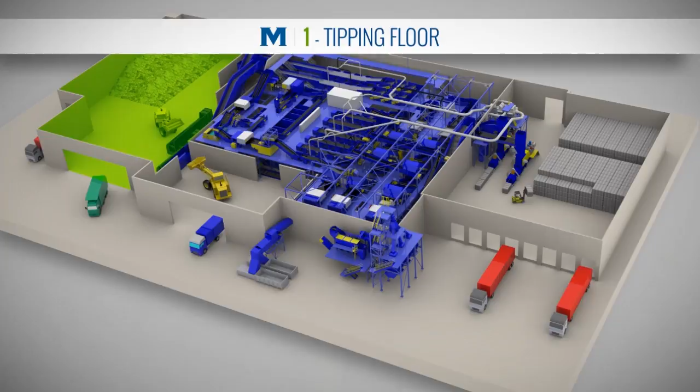A large tipping floor for incoming material is arranged so that multiple trucks unload their contents simultaneously. The tipper empties the contents of the dump trailers onto the tipping floor.

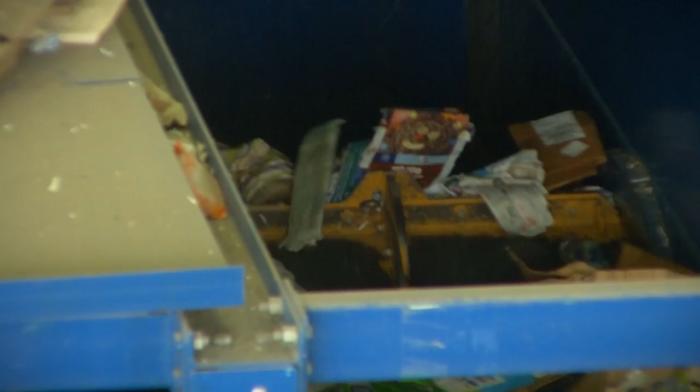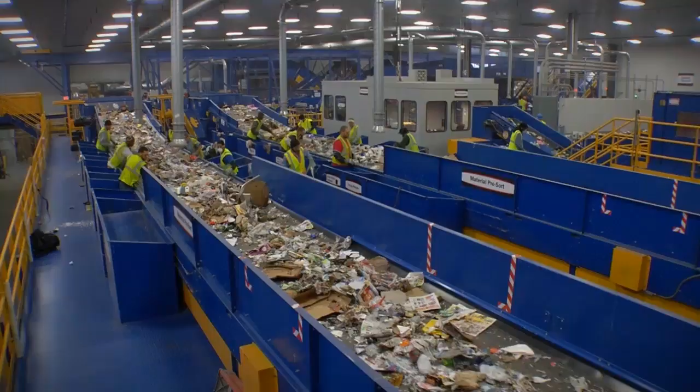The materials brought to the tipping floor are loaded into 2 drum feeders that equalize the flow of material entering the system. Sorters remove rejects such as large metal parts, electronic devices, and any objects that could damage the equipment. They also remove plastic film by using a vacuum system equipped with hoods that are placed above the sorting stations.

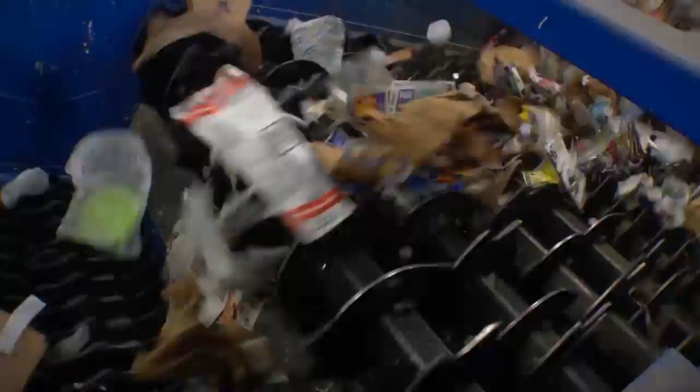Once the rejects are manually removed, the stream of material is sent to a MACH OCC screen to collect the cardboard. The cardboard bounces off the moving parts while the fibers and containers fall between the discs. The cardboard then undergoes quality control.

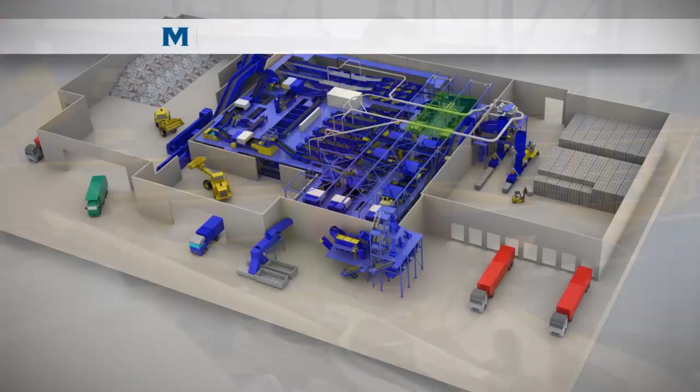The fiber is now sorted into 2 lines. The material that falls in between the discs of the MACH OCC screen undergoes a second manual pre-sorting before entering the scalping screen. The scalping screen is equipped with steel discs to break the glass early in the process to protect the equipment and prevent contamination of material. Fragments of 5 inches and under fall onto a fine screen that is located underneath. This separator redirects the 2-inch and under pieces to the glass cleaning system.

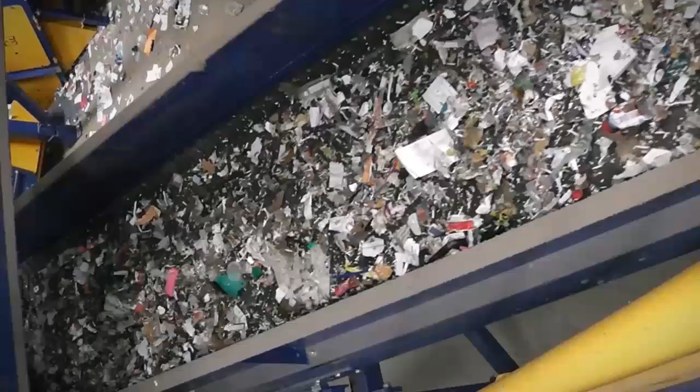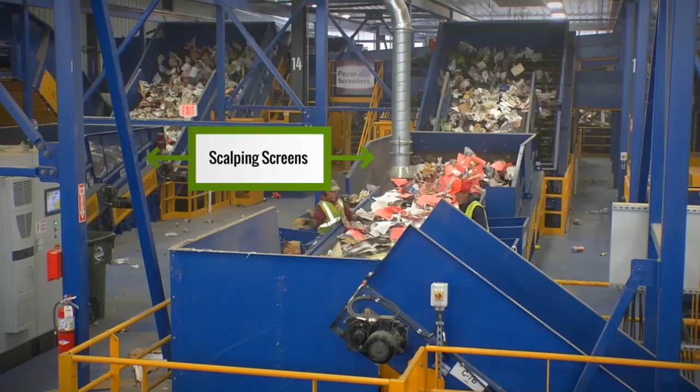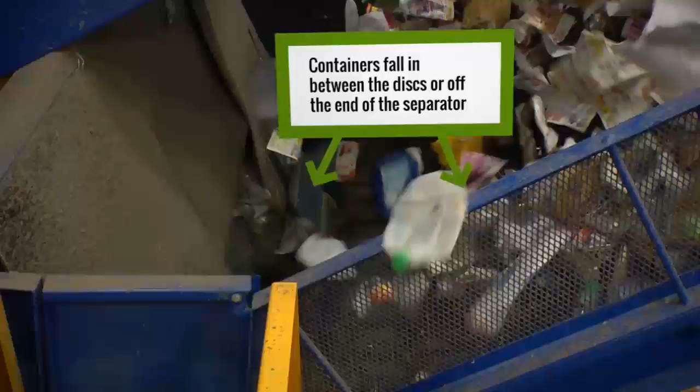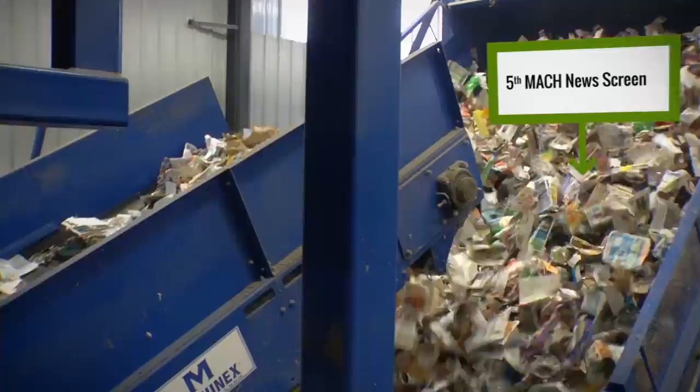On both lines of fiber, there are 2 MACH News screens, one on each side. They separate the paper from the containers. Newspaper travels up the slope of the separator while the containers fall in between the discs or off the end of the separator. The materials that fall between the discs of the previous 4 separators are directed to a 5th MACH News screen for newspaper to increase the rate of recovered fibers.

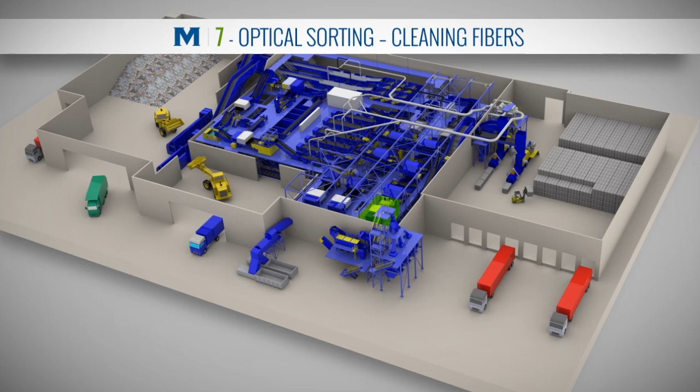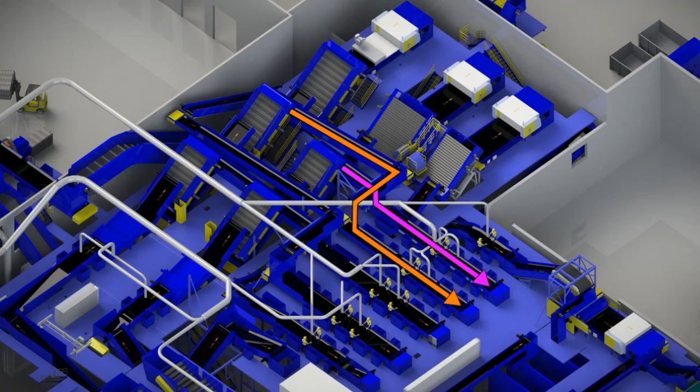The fibers exiting the 5th Mach News screen are sent to an optical sorting unit where contaminants such as brown cardboard, metals, containers, and plastic film will be removed. The stream of paper coming from the fiber line is finally directed towards a manual quality control before being sent to a dedicated bunker.

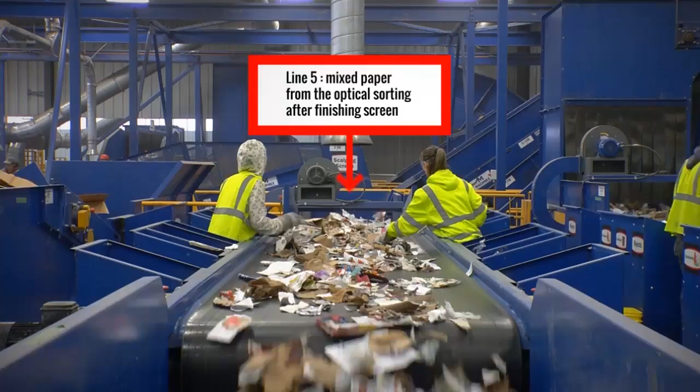Two Mach 3D finishing screens each receive distinct material streams. Assigning a different task to each finishing screen is a distinct advantage. Fragments from 2 to 5 inches that come from the scalping screen are sent to the first separator. The materials that fall in between the Mach News screens are led to a second separator.

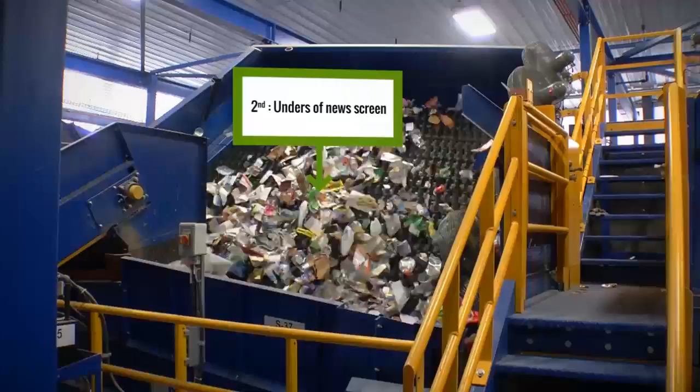In the Mach 3D finishing screen, the materials are sorted into 3 streams. Particles of 2 inches and under fall in between the discs early in the process and are sent to the glass cleaning system. Containers roll onto the side, and mixed paper sticks to the rubber disc to go back up the slope of the separator.

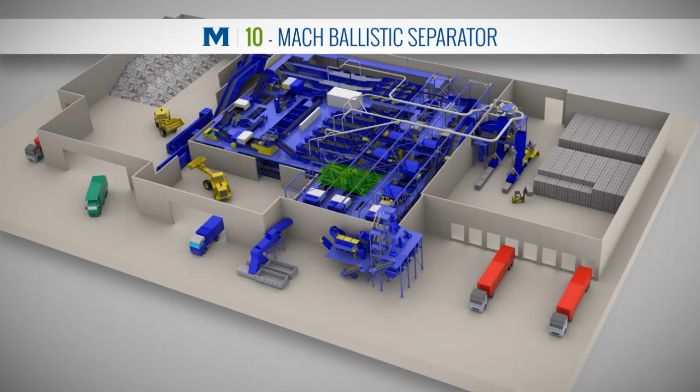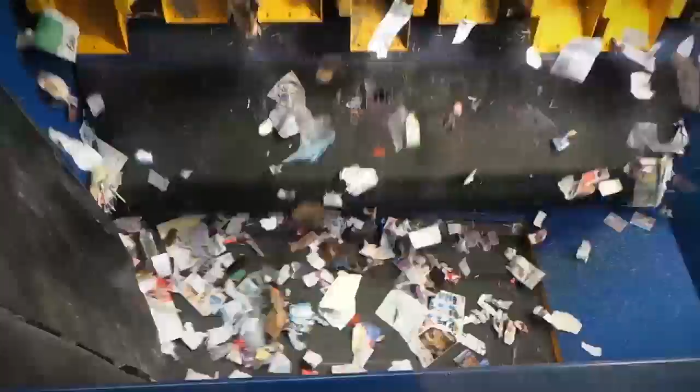The Mach Ballistic separator is not included in this system, but is an interesting alternative to the Mach 3D finishing screen. It separates flat bodies from hollow bodies in addition to removing fines.

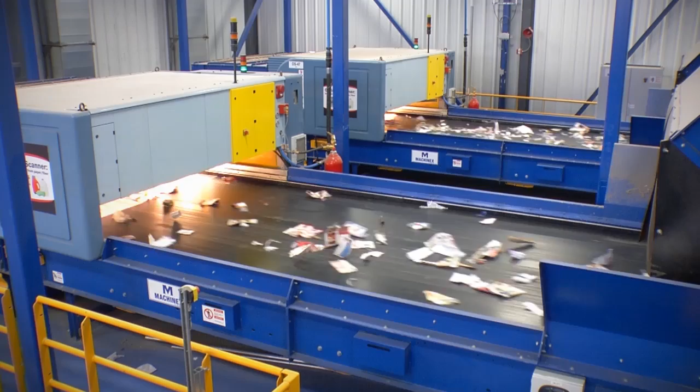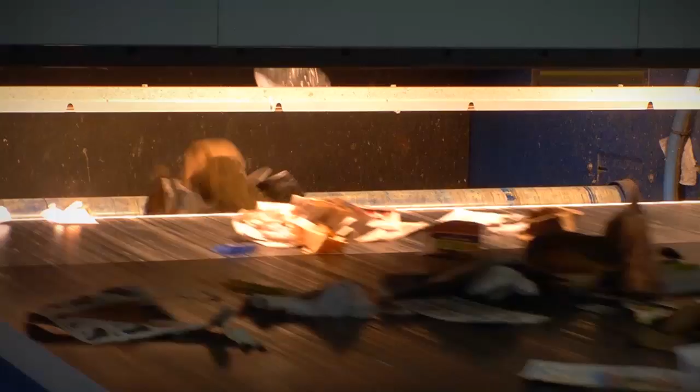The stream of mixed paper that travels up the MACH 3D finishing screen's slope will be cleaned by 2 optical sorters. The optical sorters eject the plastic and the remaining metal, which then head into a flat and light separator to be cleaned of all impurities and contaminants before heading to the container line. The mixed paper is finally sent to fiber quality control.

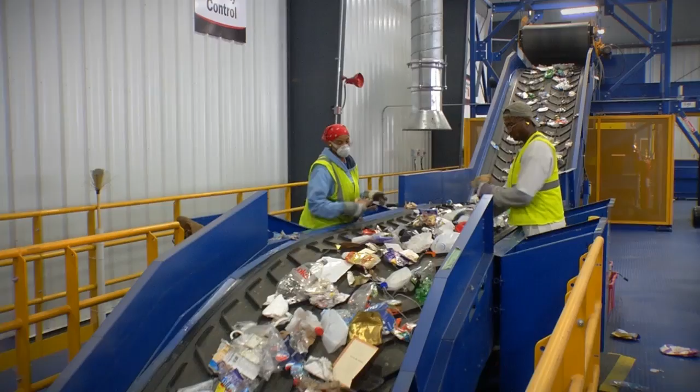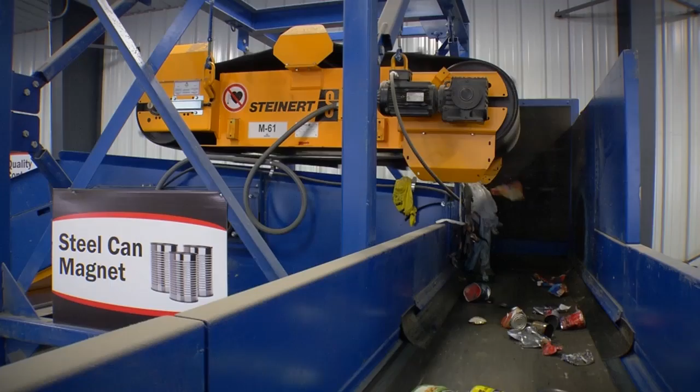The containers are now sorted. Manual sorting is first performed to remove 3-dimensional papers such as telephone directories and carton boxes. The stream of containers then passes under a ferrous magnet to remove any steel cans. Once ferrous metals are removed, the other containers are sent to an optical sorter which ejects HDPE plastics. These go through a final quality control before being redirected towards a dedicated bunker.

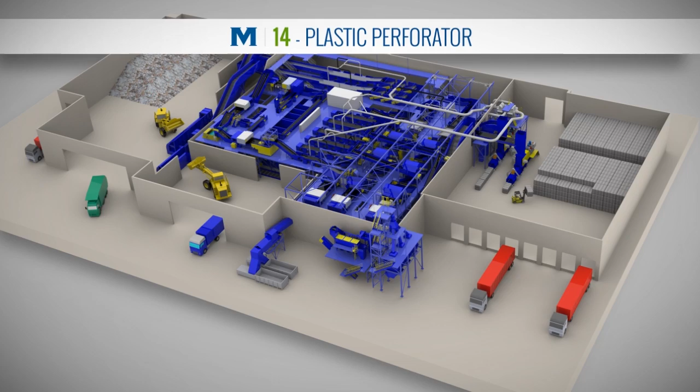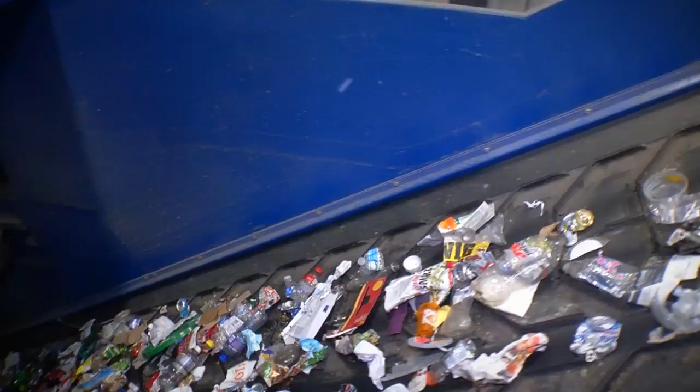Other containers are crushed between 2 roller compressors into a plastic perforator to facilitate the plastic optical sorting and eddy current sorting for aluminum cans. This also increases the capacity and quality of the bales. An eddy current magnet ejects aluminum cans. They undergo a manual quality control before being directed into a dedicated bunker.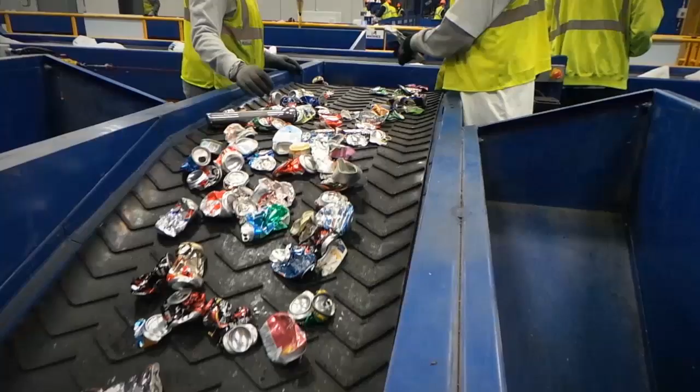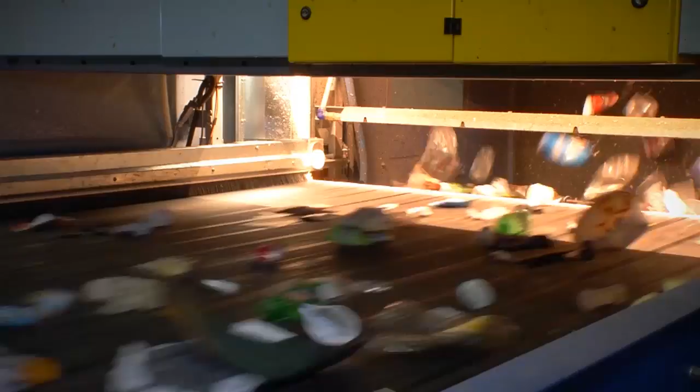The stream of containers is directed to an optical sorter which ejects PET plastics. A conveyor divided into 2 halves serves as the 2 exits of the optical sorter. One half moves the ejected PET while the other moves the stream of remaining mixed plastics, aseptics, and Tetra Pak type containers.

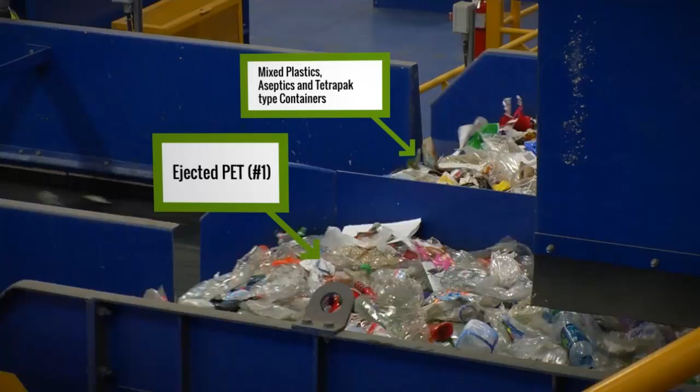The last optical sorting unit of the system is divided into 2 parts and receives the previous optical sorter's ejections. On one side, the stream of PET will be cleaned of any contaminants which will then be sent to the mixed plastics. On the second side, the remaining container stream will be sorted into 3 categories: aseptic and Tetra Pak type containers, mixed plastics, and rejects. Manual quality control is done on the ejected materials at the very end.

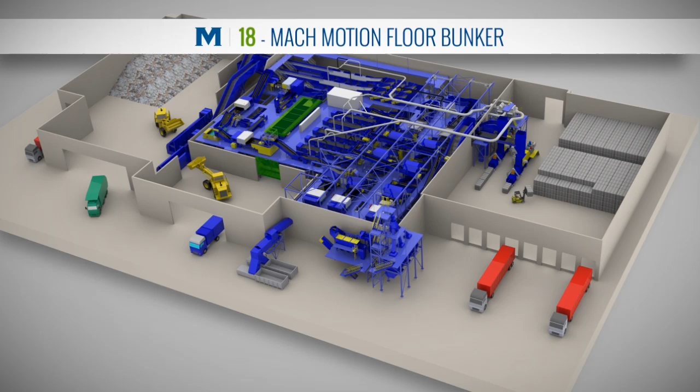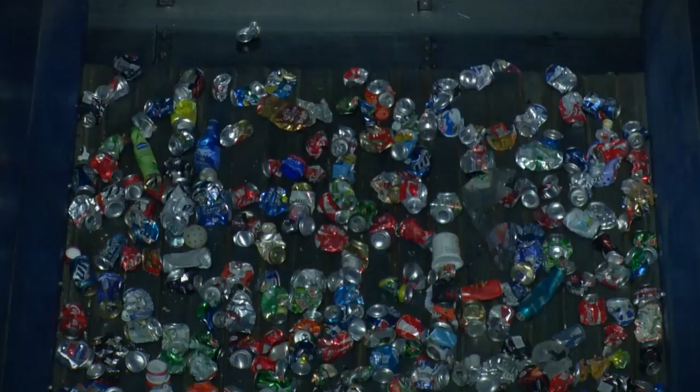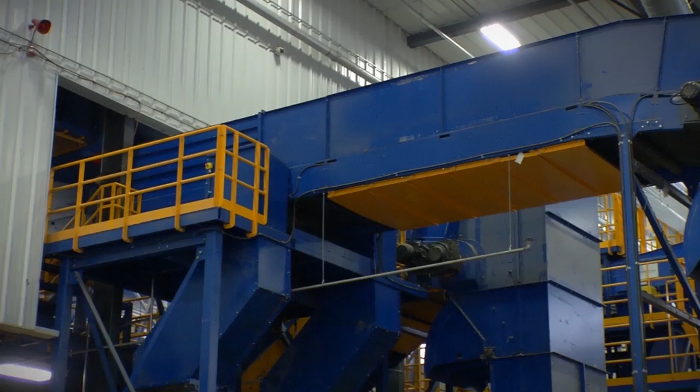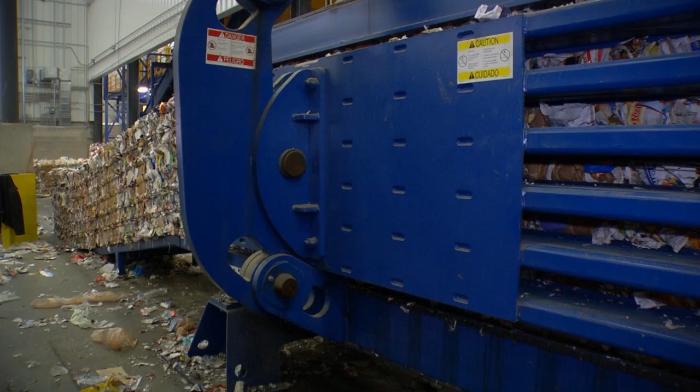The materials sorted during the process were sent to the moving floor bunker, Mach Motion Floor, which facilitates transportation to the balers. Two horizontal balers are used for baling containers and fibers. Designed by Machinex, these single ram extrusion balers, which are high in density, are among the most innovative in the industry and incorporate the steps of pre-pressing and shear. An operator manages the work done by the baler with a control system developed by Machinex.

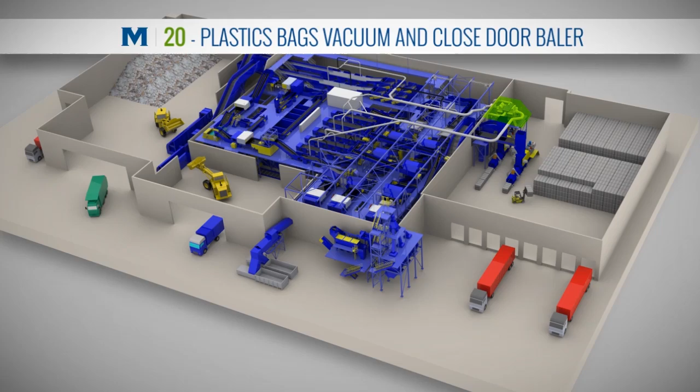Some manual sorting stations in the system are equipped with hoods that create a vacuum for the plastic bags. These hoods are connected to a central system that leads the bags to a dedicated closed-door baler.

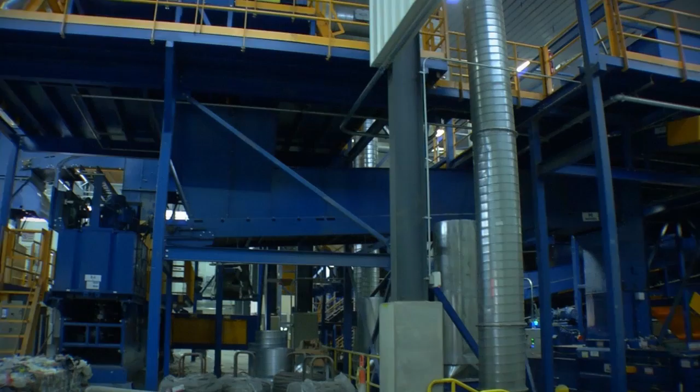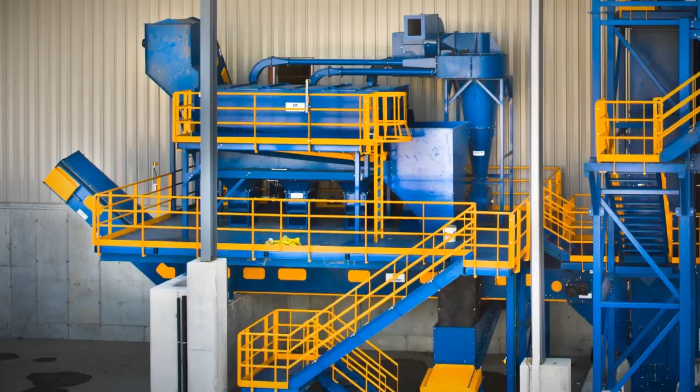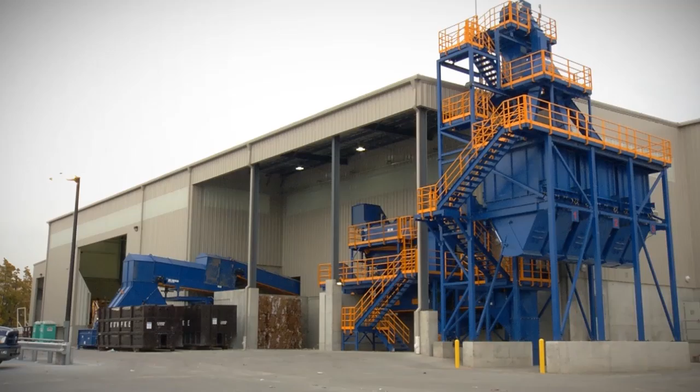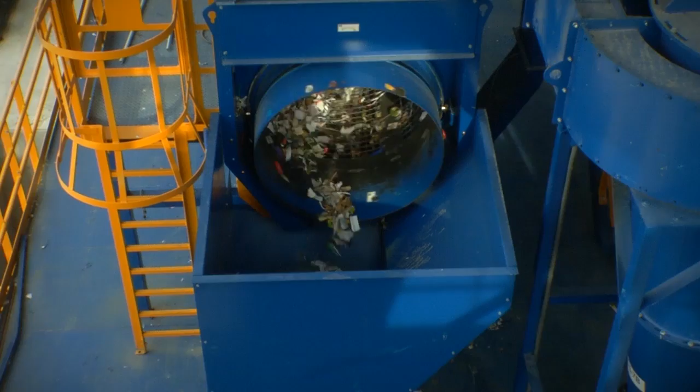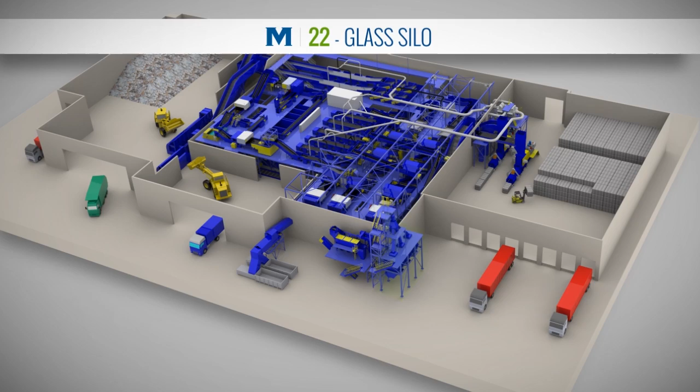The glass fragments pass through the sieve's opening and are sent to a silo outside the building by a bucket elevator. The glass from the glass cleanup system is sent to a high-set silo that will directly fill up the trailer trucks which will carry the glass to the recycling facility.

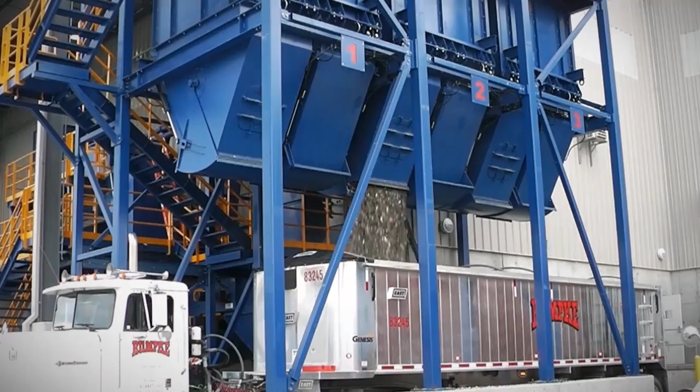Cardboard from the commercial sector is discharged into the commercial tipping floor and will be sent directly to a baler. Rejects from the system are sent into two compactors located outside the building.

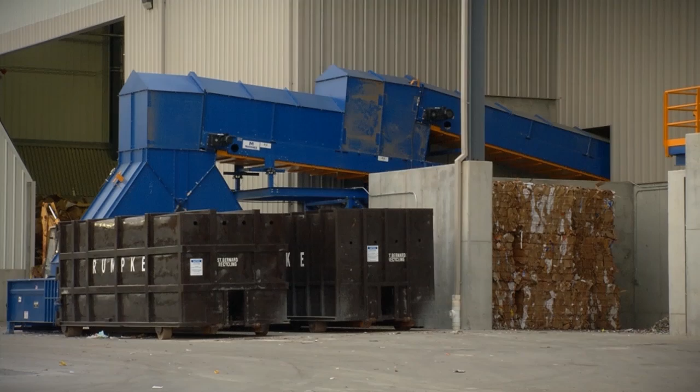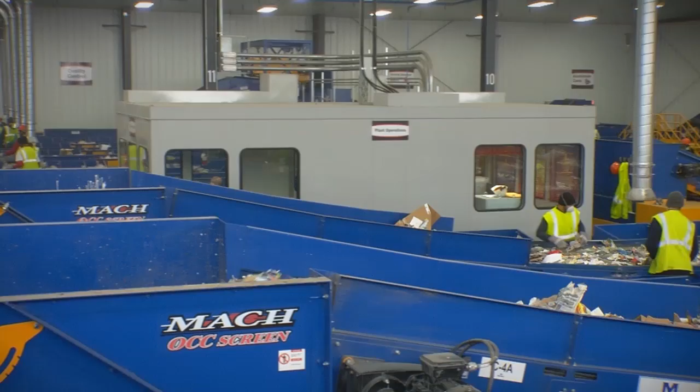The operations room, located in the center of the system, provides a complete overview of total operation. It includes a SCADA system developed by Machinex. The SCADA is an excellent management tool for the material recovery facility operator to obtain all the necessary reports in order to detect losses in production and improve profitability.